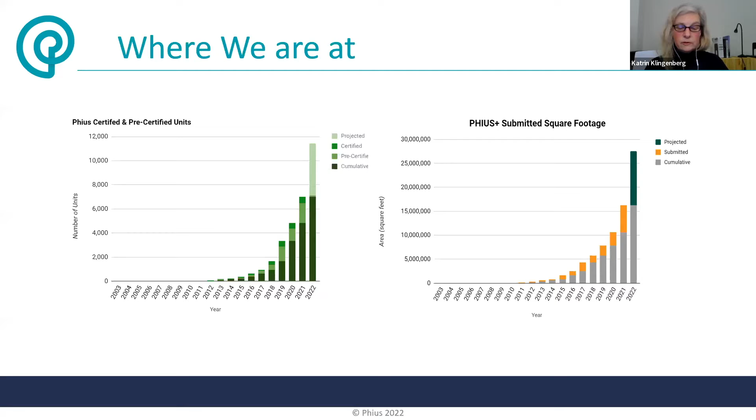Now, the point of all these graphs is, there's no point stopping here, right? We're going for everyone. And to do that, we have to bring the developers into the fold and the entire real estate professionals. We need to learn how to talk to them. So the business case, on our end, we are helping that business case by, I mentioned, the cost optimized and climate specific standards. And I'll show you here in a second how great that has been working out.

But also it is super important, what we found, to have a reliable certification tool and process that organizes everything that goes into a high performance building, that addresses all the risks. And that is not just the energy efficiency, that's, as you all know, also the hygrothermal performance of wall assemblies, moisture control, because these better insulated buildings are more subject to those mistakes. So if you don't know your building science, you can get yourself really into trouble. So it's really important that you have a tool that addresses all these things.

And then what we also found in our early years, you can specify as much as you want. In North America, at least, the builder holds a great part of the power of the construction process and bringing the project to be a successful end result. So third-party assurance and quality was always right up front, most important for us. So you can see here our quality control books. This is for non-residential, but for residential, we have all different versions of that.

And then the general framework of the design methodology for Phius Core and Phius Zero, essentially very similar to the other passive programs that are out there, like space conditioning limits, but those are different. They are more differentiated and more granular. The air tightness threshold, and then also a source energy limit, but all with different adjustments for different locales.

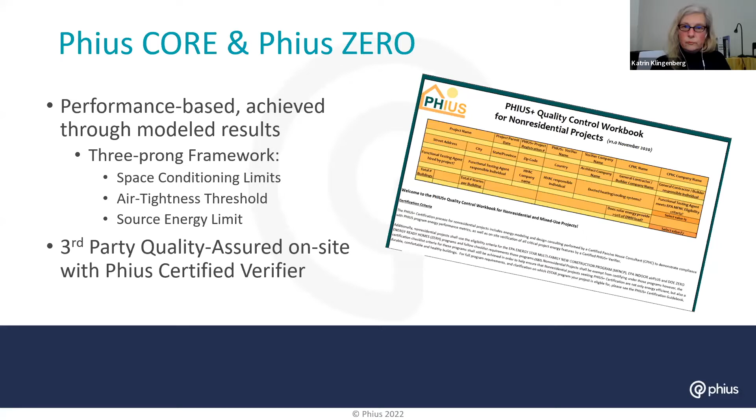So, and you might also notice we have simplified our certification, labeling, branding, name. We are down to 2 basically, with the Phius Core, which was our original traditional certification, and essentially translates into zero energy ready. And the Phius Zero that then, on top of that optimized building shell, adds renewables on site. And for our certification, you can actually also buy offsite SRECs to reach your goal of net zero. SRECs standing for solar renewable energy credits.

And again, for those who are not familiar, or new developers who are hopefully joining us, we have calculators that make this whole process really simple. It's a very simple to use tool that lives on our website. Our certified consultants, CPHCs, are very familiar with that, obviously. So if you build your team and you have one on your team, they will be able to fully show you the lay of the land of all the certification things that should and need to be done.

This slide is here to let you know the certification process is applicable to all types of buildings, commercial, residential, light industrial, what have you, and also for retrofit construction. So you can see right here, we have these handy dandy drop downs. For the units, you can switch to metric as well if you like. The first drop down right there, under there we have the choice between residential and non-residential, and then under that is new construction or retrofit.

And based on what you pick, your targets change. So the second box from the bottom there shows you the annual heating demand, the annual cooling demand, and the peak heating load and the peak cooling load.

And under our modeling protocol, you have to meet all four. So based on our experience, to truly optimize a building for heating and cooling, and not just for heating, you need all four. There's a design methodology, how we set the standard. We published all that peer-reviewed through NREL, so if anybody's interested, you can look that publication up. And all the specific rules and guidelines, there's also a set of prescriptive rules that back up the quality of the design, and that is all in this fantastic publication that the Phius staff has put together, our Phius certification guidebook. So enough to that one.

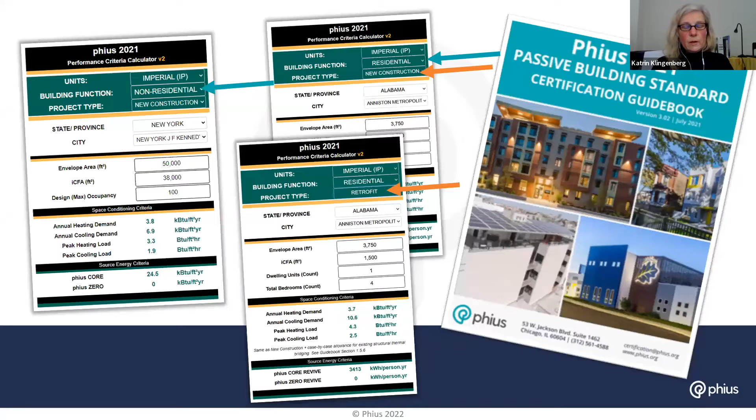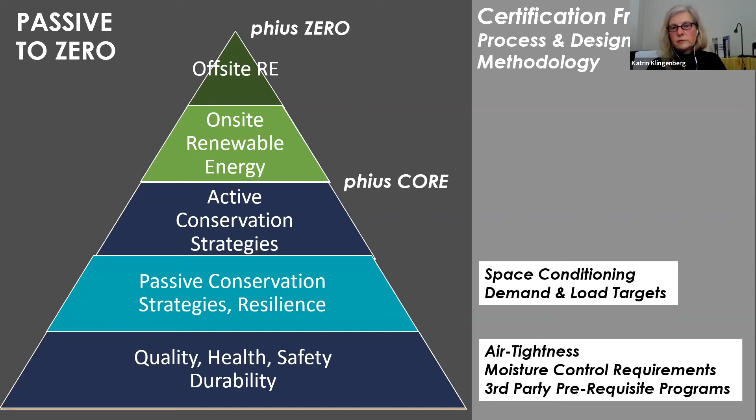And this one, I wasn't sure if I even should hit you with that one, but it just very quickly graphically shows again Phius core, the baseline, air tightness, moisture control requirements, quality, health, safety, all the benefits that come with that, durability, passive conservation, resilience, and habitability, and active conservation strategies that take you to this sweet spot between conservation and generation. And once you are there, you have done that optimization process and followed the design methodology, then you add renewables to zero out and to get to net zero and beyond. Positive, of course, if you so desire. So that's essentially that, and that's as much as I want to get into that one.

So for 2021, cost matters, especially to the developers, right? If you cannot make that cost case, you will not get the developers to the table. And we learned this over and over again. So the code landscape is changing. And for that, under 2021, we're addressing what is coming next down the road for anybody who's building these high performance buildings, because we have to go to zero, obviously. Just passive plus fossil fuels is no longer going to cut it. We already know by 2030, we have to wean ourselves off of fossil fuels. A lot of jurisdictions are already flipping the switch: New York City has, and Boston is following along, and Washington, DC is following along. And so that means that we wanted to update our certification to notch people along on the path to electrification.

So in 2021, our latest update, we still allow for the time being gas for Phius Core, but you have to have a fuel switching transition plan in place, because we anticipate that by 2030, gas will no longer be available. Jurisdictions are already setting into motion that they are not even going to invest in gas infrastructure anymore, because it's already clear that it is going to go away. But at this point in time, it is still the cheaper option. But for Phius Core Prescriptive, which is a new program that we brought to the forefront for single family and townhouses, and for Phius Zero, you have to be all electric. So that is really setting the tone for future certifications today.

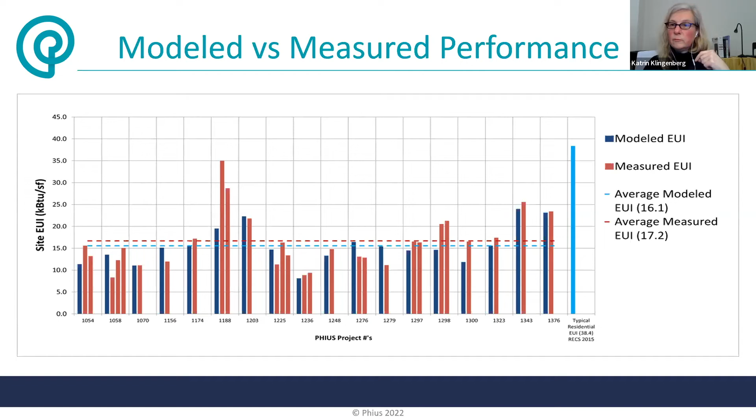And now if we add the layer of microgrids and energy services business models on top of a broader developer model, basically building as infrastructure, and now we're adding generation to it and we're starting to sell as a micro producer, this modeling becomes even more critical. It needs to be as accurate as possible so that you can actually rely on your profits, and again, also validate your investment.

And I believe the level of scale up that we're looking at and needing for the climate will come from private capital. And the only way we can make that business case to developers is by showing them that we have the tool to assure their projects get there and realize those monetary gains that we have been promising them, but we haven't been able to show them yet because it takes a while to build these buildings and get the data back that it actually is true.

And that leads me to the next two projects. Thanks to the help of the Mass Clean Energy competition and NYSERDA's Buildings of Excellence competition, they wanted to know these answers too. They're like, okay, is this even feasible? What's the incremental cost? And they basically held competitions. They had projects submitted, and then they asked in return for funding very detailed data for these projects to see what really the incremental cost is.

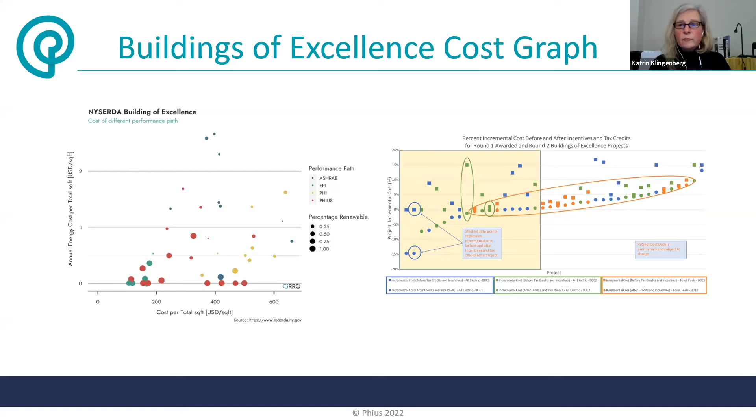And most of the orange dots, again, on the right slide, they are to the left. So close to the 5%, even though we can't tell exactly which one is which, but most Phius projects are still using some form of gas, all of them that are in this pool. So therefore, most of the Phius projects really hit that, without even knowing more detail.

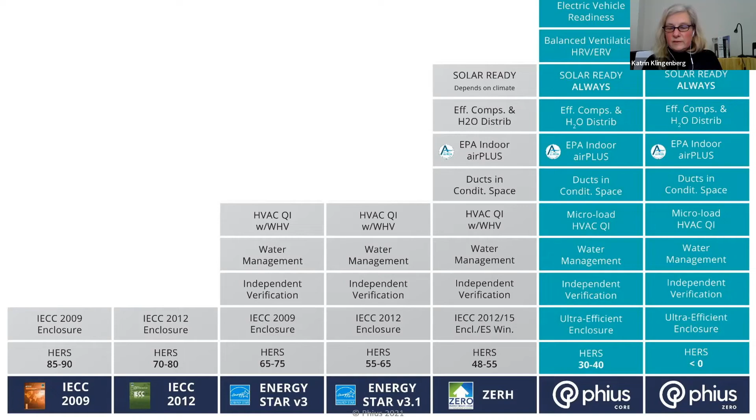And I only have this staircase in here real quick, don't need to say much, but the ERI dots performed also very well, very similar to the Phius dots. And the reason is that we've been working together since 2012. We've been aligning our best practices with Zero Energy Ready Home, and they have a very similar philosophy of optimization between conservation and generation, just that we are more conservative. We were not willing to give up the passive survivability, and therefore we push the envelope a little bit further than the Zero Energy Ready Home folks. That's essentially the only difference, and the extensive quality assurance.

Okay, almost done. So I'm talking fast and it's late.

Just a couple nice pictures and some other things to maybe muse about why all of a sudden it's starting to take off and why we're doing well. And it's not just hard costs and numbers, it's also experience. So a little bit walking memory lane here. This is the Smith House after a blizzard this year. Still standing proud and doing fantastic. And by now it has a 5 kW PV system on the roof and an electric car in the garage. So doing just fine and got this on before 2030.

But that said, at the time, we were using the PHI standard, and the walls are 18 inches thick. And so I'm trying to convince the community, for example, here in Chicago, who has not bought into that yet. And what they still remember are 18 inches of wall. So they say, well, you're telling me I should do a multifamily building like this, no way, I'm losing this much real estate. I'm a developer, every inch counts, right? Like, no. We've come way further.

We know now how to optimize the wall, and especially in bigger buildings, because they become internal load driven. Insulation is no longer that big of a factor. In fact, if you over insulate, you overheat the building. So at that point, for bigger buildings, that balancing act between heating and cooling and those specific granular targets is crucial to get the most optimal solution.

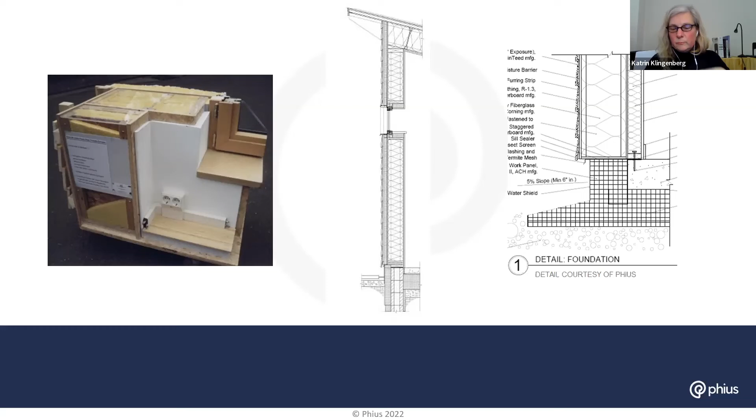Then we tried to optimize and squeeze as much cost out of it by inventing this float slab, trying to get rid of anything and everything that we could save on to make this more cost effective, because on the first single family homes we got killed. It was 25+% additional cost, and it was clear that we were not going to be able to sell this.

Okay, so two multifamily buildings. This is a most recent certified project in the Bronx in New York City, and super great. This is the next generation already. They're prepping for going all electric.

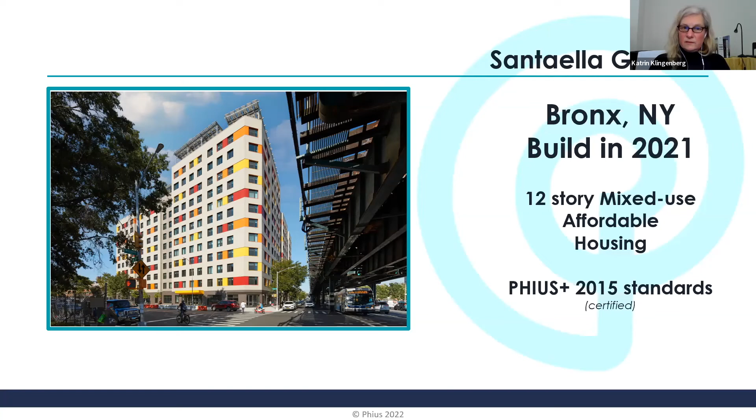But the cool thing on these big multifamily projects that we're now certifying all over New York and Boston, and now starting in Chicago too, and Seattle, of course. The cool thing is the designers, the architects, the CPHCs, they've learned. So initially, when they first started, they were all freaking out over their thermal bridges and cladding, and they bought all these expensive fasteners, multiplied by I don't know however many times, and the developers were all like, yeah, nope, we're out. This is too expensive. You guys are crazy.

So a couple of first projects we got in, but then the developers started to work with the builder and with the architect and say, can we not do this with materials that we have here in North America? And then people went to the drawing board, and of course we had all the materials we needed, and they figured out how to do all this.

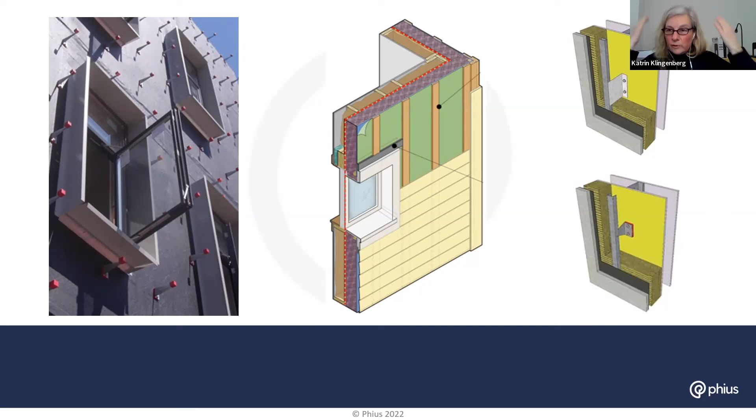And you can see here also people are not even wasting their money anymore on insulating steel frame, steel stud framing, because there's not enough insulation in the world to insulate steel. Come on, we can cut it, put all the insulation out, but we're done. So we're getting smarter, we're simplifying, we're cost optimizing our technology and our approach.

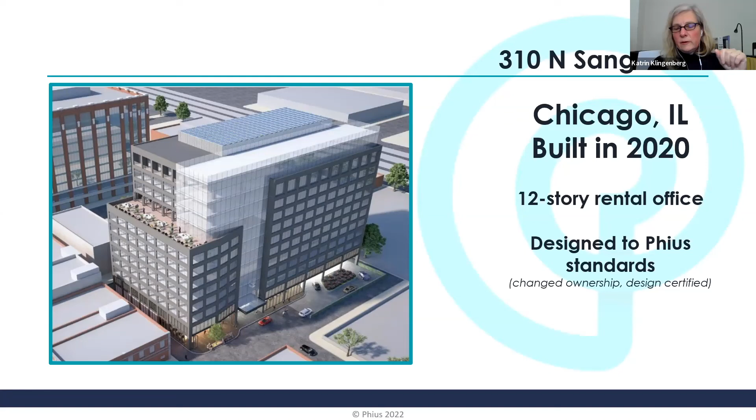Office buildings. This one is in Chicago. It got built. It was design certified, but not certified. The developer sold off, and the new owner didn't care. But doesn't matter. The cool thing was to go through the process with SCB, Solomon Cordwell Buenz, heavy hitter, national architecture firm. They might even be international. I can't keep track of all this stuff now. But they redesigned their details, and they came to us.

At first, they were totally afraid, like, oh no, this is not going to work, it's too difficult. All these 18-inch thick walls, no more 18-inch thick walls, forget it. So then they came back and they're like, wow, this was easy. This is very close to how we do this anyway already, but more optimized. And we were able to save money. So essentially, even though the new owner in this office building didn't want to go for certification, they were able to keep all the specs the same because it was very similar to how a normal building would be constructed.

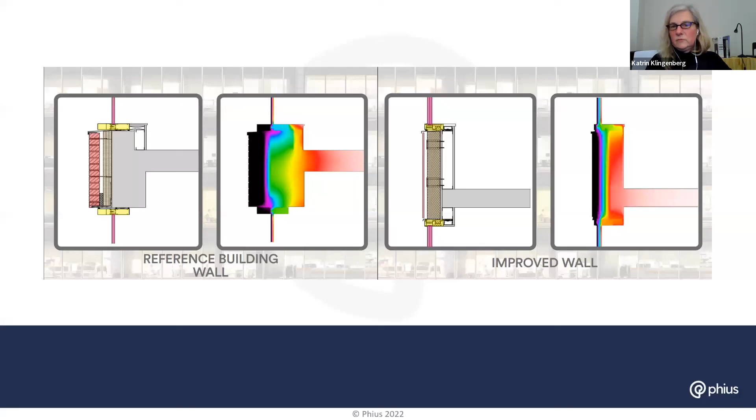And Jay Longo, one of the main designers, he was on a panel with me. He said, as far as I'm concerned, this Phius standard should be code for office buildings now. There's no reason. We do this every day. We can do it today. If we just had these guidelines that keep us in line with those energy performance targets. Done deal.

Okay, so almost done with talking. Developer Summit, if you're here, if you're a new developer, please join us. We assembled three amazing days, one for single family development issues and challenges and lessons learned and shared. Second, for multifamily from six flat to high rise. And then the third one on financing solutions. And we have some of the most experienced developers who are willing to share everything they've learned with you, with the practitioner community too, so that you can take it to your developer, that you can help us to grow this.

And Jeremy Rifkin, some of you might remember him, the Green New Deal, our keynote speaker from Washington, DC in 2019. He really was amazing. And we've stayed in touch since and have been working together on the next step and the next scale up. What he's talking about, we need everybody. We need to get to the private capital. We need to get to the developers. And he has agreed. He's very concerned with this. He sees buildings at the core of this. In his mind, buildings are part of the new energy infrastructure for the new renewable grid. And he was so kind and said, I'm going to open this because this is really important. So he will give the opening remarks on Tuesday.

So, and with that, I'm going to stop. I just want to give a little shout out for James, because this is such a beautiful light industrial project. And with that, I'm going to stop talking. Okay, thank you.